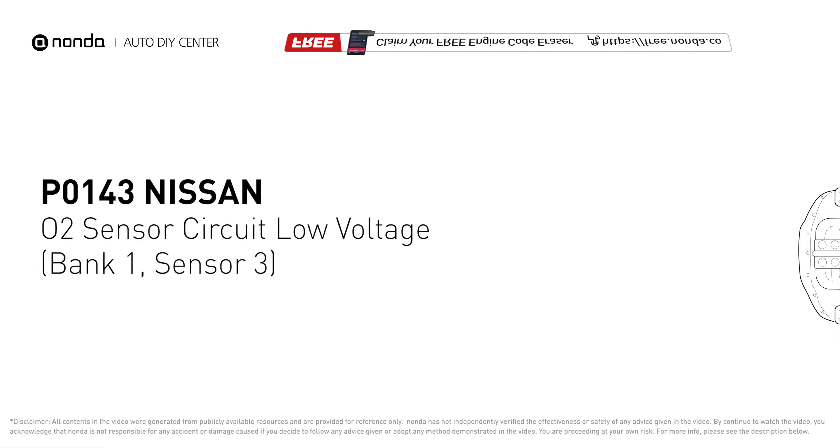It indicates that there is a fault in the oxygen sensor, located in the Bank 1 Sensor 3 location of the vehicle. Here are 3 of the most practical solutions to fix Nissan's P0143 error code. Method A. Paste the exhaust leaks.

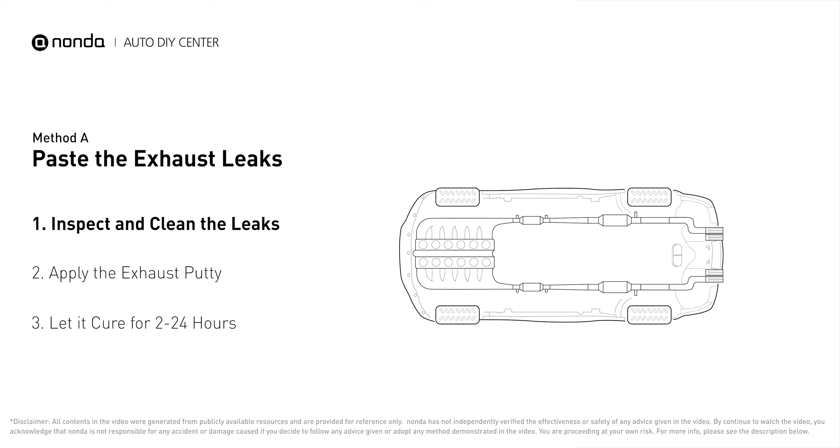The exhaust system begins at the engine combustion chambers and runs along the undercarriage of the vehicle, eventually ending with the visible tailpipe. If you have a leak around the corner, get some exhaust putty to seal it up. First, get sandpaper and a wet wipe to clean the leaking area for better application. Stir the paste well to activate it. Apply and press the paste to seal the leaking area.

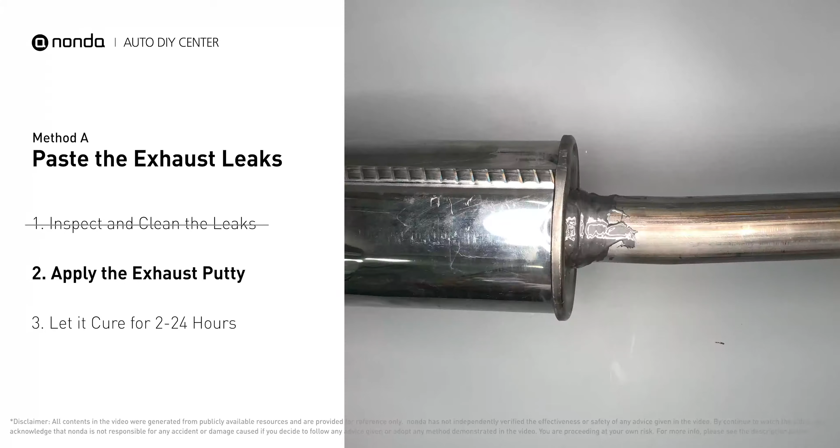After the application, don't start the engine because the positive pressure from the exhaust will blow out the paste. Let it cure for 2 to 24 hours, depending on the external temperature. The hotter it is, the quicker it will cure. That means you can use something like a hair dryer to heat it up and make it cure faster. Method B. Wrap up the exhaust leaks.

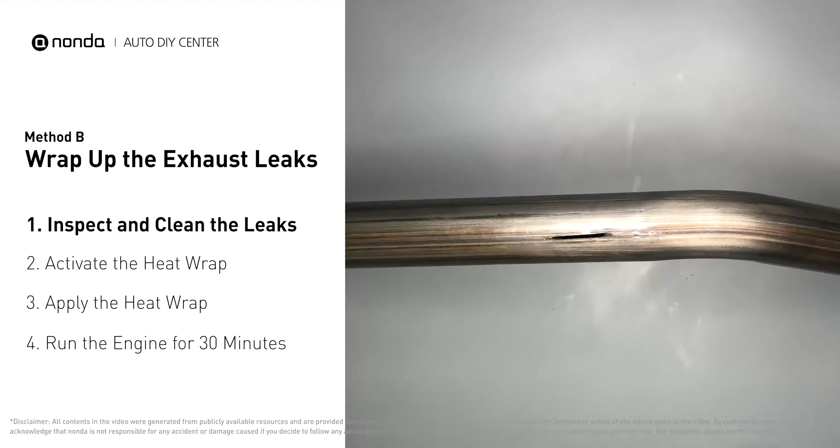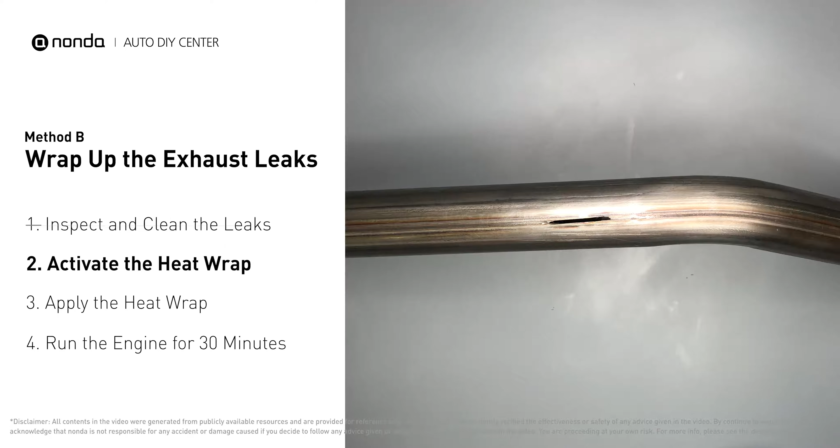Exhaust pipes are made out of rolled steel, and there is a welded seam on them. Like this one, the seam will often rot and leak. First, get sandpaper and a wet wipe to clean the leaking area for better application. Get the heat wrap out and put it in the water for about 30 to 40 seconds to start the activation process. Then, remove it and squeeze out any excess water.

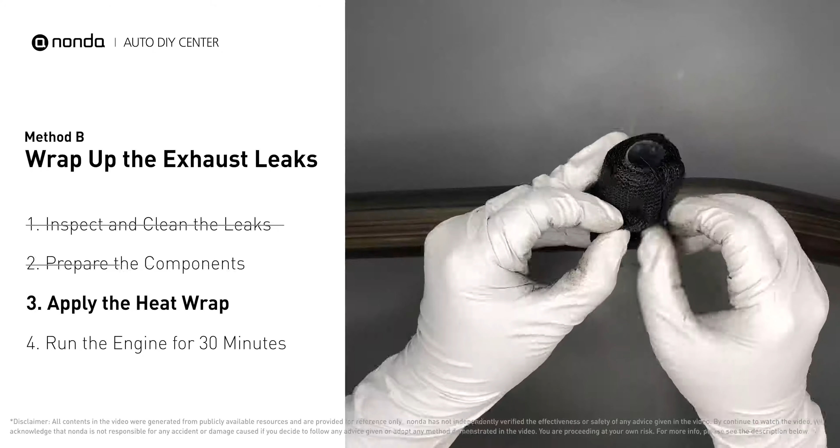Wrap it around the area and overlap it a couple of inches on each side. Repeat the process 3 or 4 times. Then squeeze it to make the resin go all through it. Start the car and let it run for 30 minutes so the heat cures it and makes a permanent fix. Method C. The oxygen sensor.

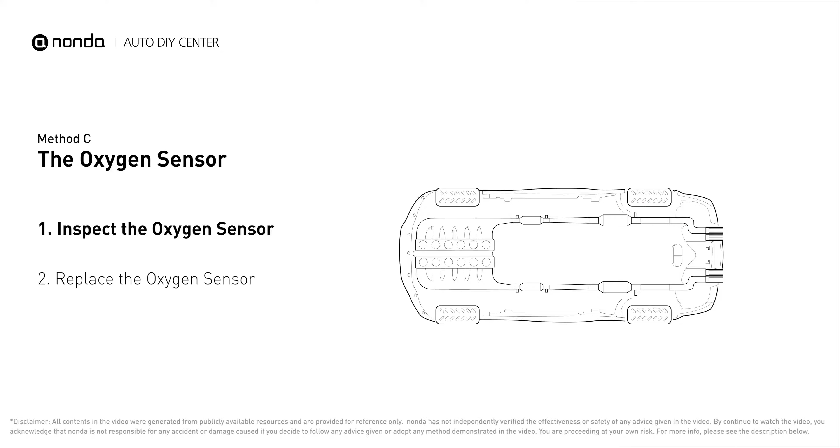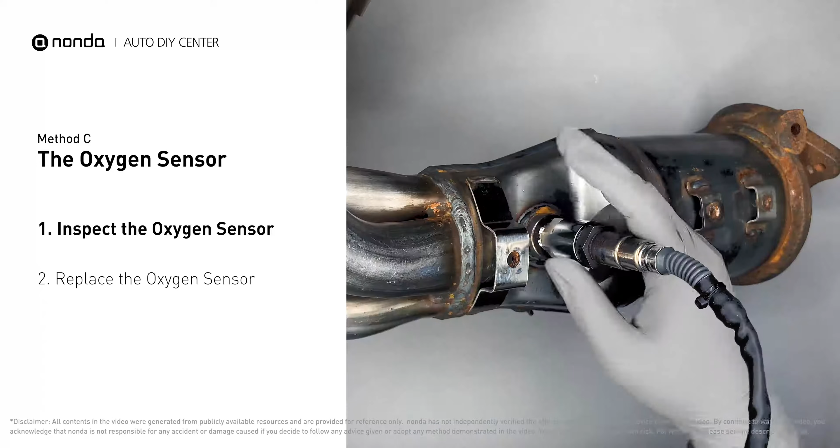This oxygen sensor is located right after the catalytic converter. Bank 1 is on the side with the cylinder number 1. Sensor number 3 is downstream of the last catalyst in the exhaust system. Visually check the oxygen sensor's electrical connections, wire harness, and metal tabs for any damages. If damages are found, replace the oxygen sensor.

So here are 3 of the most practical solutions to fix Nissan's P0143 error code. After the repair, you can now use the ZUS app to clear the error code. And tap the rescan button one more time to make sure everything is fine with your vehicle.